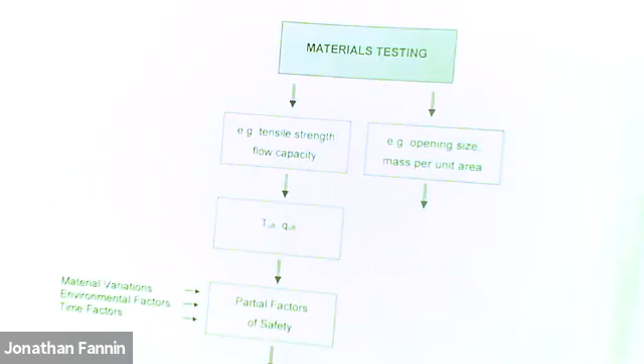And now some observations on philosophy.

What have we done? We've done materials testing, creep testing, wide width testing, and for example, I'll just pick up on this tensile strength.

We do materials testing for tensile strength, and we get a value of T out. That could be from wide width strength, or it could be from isochronous load strain testing and interpretation. So now there's our materials testing.

Now what about design? If we go over the page here, our design, whatever the design guide is - for example, US Federal Highways, British Standard, or the Canadian Foundation Engineering Manual, which largely cites the US Federal Highways.

Choose your design manual, your design guide, and you'll make an analysis, a geotechnical analysis, and the geotechnical analysis will tell you how much strength you require for the application. And at this point, we may be asking ourselves, is there a factor of safety in here?

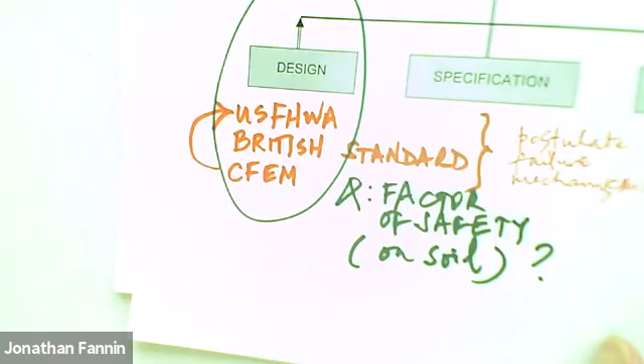And then ultimately, I want my T allowable, however I got it, to be larger than T required. The T allowable must exceed the T required. That's how the system's working - this is the heart of geosynthetic design for soil stabilization.

And once we've got the strength, and once we're convinced that we've got a satisfactory strength, then what about the following issue? So now let me continue with the thinking part here. Here's my wall structure, and I've put in a whole bunch of reinforcement.

And I've provided, let's put a base layer down there as well. They're all the same length, same vertical spacing, no problems. Even though it's not quite perfectly drawn, let's declare that they all have the same spacing vertically. Let's count the number of layers: 1, 2, 3, 4, 5, 6, 7. And we have 7 layers.

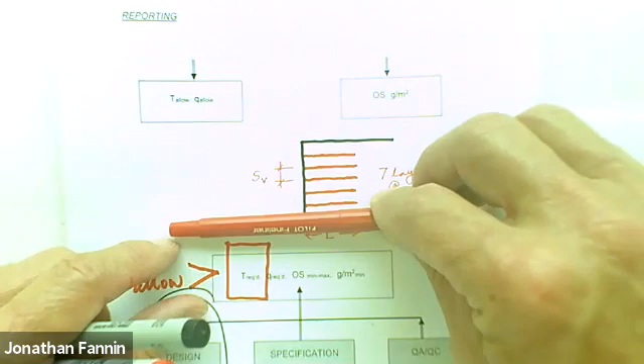At a T allowable, and that T allowable is greater than T required from design. Perfect, perfect, perfect, perfect. That's basically reinforced soil in a nutshell. And it could be a wall, it could be a slope, it could be a wall on soft subgrade, it could be an embankment on soft subgrades, okay?

Continuing with the philosophy here, the writers of the design guides may say these design guides are good for these applications, and we provide you with equations, limit equilibrium approaches for applications like this, but the design guide is not appropriate for other examples or applications such as this, that, and the other, because we don't have a basis of codifying. There may be some constraints on just how universally applicable the design guides are, okay?

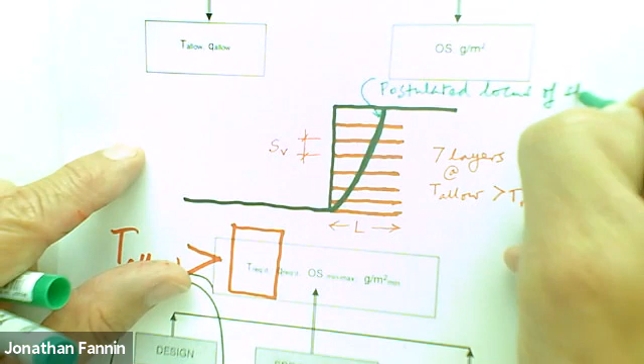Now, let me return to this image to say, so far so good. What have we left? What do you think we need to do as a closing on design? Let's say we postulated a failure mechanism, and the failure mechanism is a locus of slip like this, okay? There's our postulated failure mechanism. Postulated locus of slip. Okay, let's hope we've got this correct.

The final thing then to do is to make sure that we have adequate bonds. For example, the bond will probably be most critical at the top layer here, because the confining stresses are relatively low, okay? So this is the strength part, right? Let's put this as strength, and this is bond. So now we need to know something about interface friction and or bearing if it's a grid. This is the strength aspect of the design, adequate strength, and now we need to know something about adequate bond, okay?

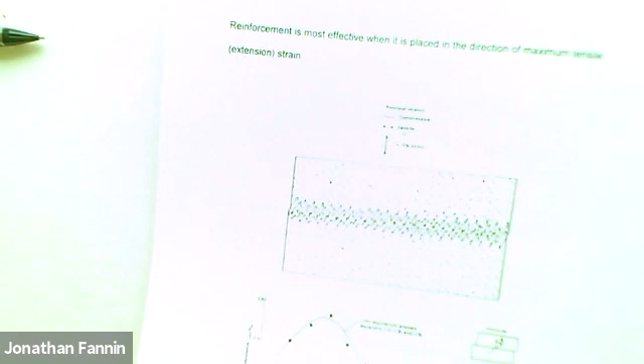So moving forward then, we flip the page, and let's ask ourselves a little bit about bond, okay? So I'm going now back into the literature. Let me grab a couple, bear with me, please. Here's a geotextile. Let me get another geotextile. Here's a black one, and let me get a geogrid. And I don't want you to think the whole world is made up of Tensar grids. So here is a woven geogrid, and here's an ancient Tensar grid, just because it's a little easier for me to show it to you in its full extent.

Right? Now, can you imagine? I embed this in soil, and then I want to pull it out. Okay, let me turn it sideways. There's the geometry, and I want to pull it out. I want to know something about its resistance to pull out, its bond. And you might postulate a means by which you think that bond is mobilized. How does it mobilize the bond? Does this geogrid mobilize bond in a similar or an absolutely identical way to this geogrid?

And again, let me translate it. Let me, can you imagine I've embedded it and I'm pulling it out, and it's being pulled past, okay? And how does something that has apertures like this, or apertures like this, how does the interface strength get mobilized? And how does that compare to something that's a perfect sheet or fabric?

Now let me take you to this. It's actually an image from a PhD thesis at Cambridge University a number of years ago. It's direct shear box testing, right? There's actually a very small offset. Do you see that very small offset there? And do you see the very small offset there?

So this is direct shear testing. The top half of the box has been pushed over the bottom half of the box, displacing it just a little bit to the right. Markers that were embedded, and at that time X-rays taken of the markers, are showing the development of a shear band. Here's the shear band. That's where all the action is happening in the shear box.

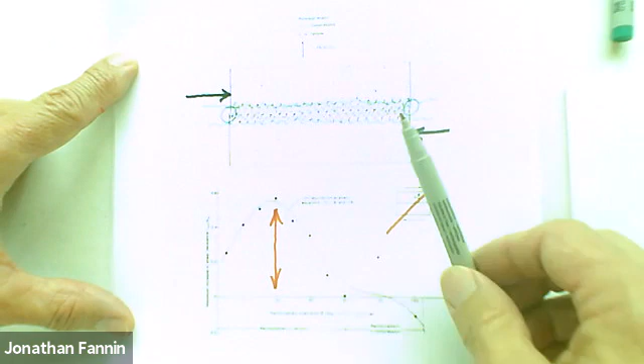And a fellow, Richard Jewell, came along and he looked at what if I orient the reinforcement in the shear box? I put some reinforcement in there and see what that does to the increase in the shear resistance. And what he found was that at about an offset or a reinforcement orientation of about 30 degrees, he got the maximum increase. There was an optimal orientation of the reinforcement, okay?

And that optimal orientation of the reinforcement, producing the maximum increase in resistance to shearing, was associated with orienting one or more layers of reinforcement in the direction of principal tensile strain in the soil. I think perhaps that becomes fairly self-evident to us. Now, if we take this recognition and I rotate this a little bit like that, can you imagine now, I'm going to draw on top of this, can you imagine now that I have, let me draw it as a slope.

Here is a sloped structure, and there is my ground surface. Can you imagine? Remember I drew that locus of slip earlier? We have a locus of slip. Do you see that? I have a locus of slip.

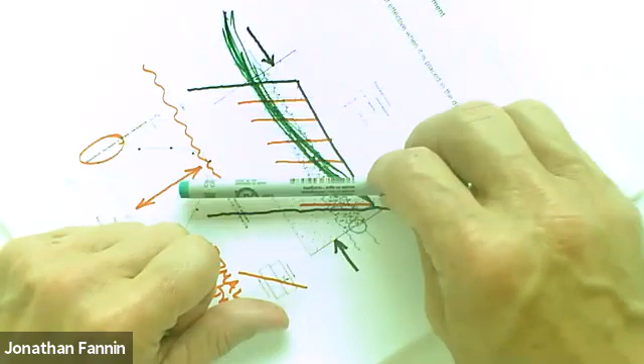It transpires that putting the reinforcement in horizontally is orienting the reinforcement across a locus of slip, aligning it in a direction that will cause it to go into tension in a reasonably optimal fashion. That's how it works. Reinforcement is most effective when placed in the direction of maximum tensile or extension strain.

And if it was a slope, or indeed, let me take it up and make it a vertical wall. It's this orientation of the locus of slip that's important to us. And what that does... oops, I'm knocking things around a little bit. What that does for us...

Let's now just examine one layer of reinforcement oriented at this reasonably efficient direction. What it tends to do is generate tension, and it's done by deformation. The deformation of the soil bonded to the reinforcement takes it into tension.

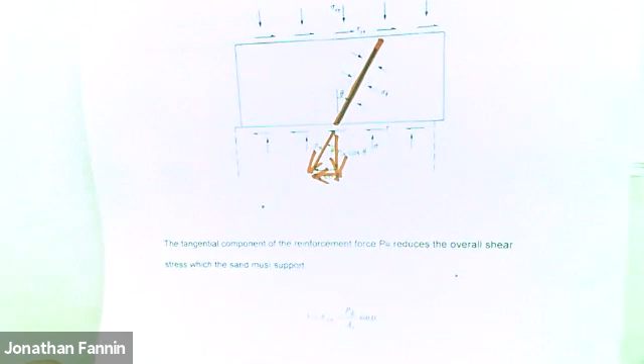We have a component like this, so we have the tension here, which we can split into a vertical component and a horizontal component. The vertical component tends to increase the normal stress a little bit. The horizontal component tends to reduce the overall shear. So that's a little bit of how the system happens to work.

So now we have a keen interest in understanding this interface bond, the soil geosynthetic interface bond. If I go back to the figure that we had a little earlier, see where I had the bond here? See where I had the bond.

Let me just... there we go. So I can even use that same phrase, soil geosynthetic interface bond. Let me write that in: soil geosynthetic interface bond, okay? And perhaps we'll go in here and put tensile strength. So how are we going to get this bond?

Let me use, for simplicity, a rigid sheet. I can get the interface bond by putting the rigid sheet in a test device, such as a direct shear, and shearing the top half filled with soil over the bottom half, in which this is resting at the plane of shear. In other words, I could go in to the previous page... I guess I can do it here. I could get the interface bond by running a direct shear test, and I'm shearing over the surface.

Let's take this out. I can get an interface bond in direct shear by shearing soil over the top surface of the material. And the alternative to direct sliding resistance would be to do a pull-out test - I could put the material in a box and then pull it out of the pull-out box.

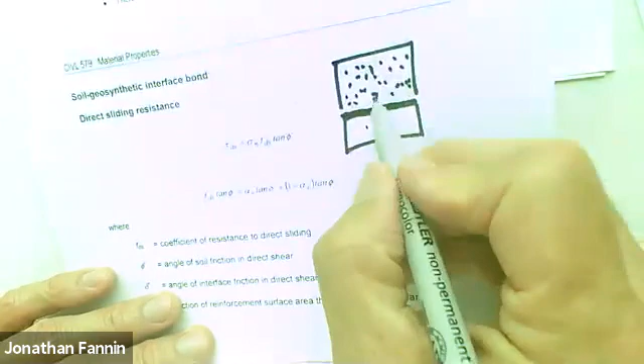So let's look at bond in one of two ways: in terms of direct shearing resistance or direct sliding resistance. So I have my shear box, with soil in the top half. And I'm going to block off and put the material of interest, which will have to be a planar sheet. Now I can shear the top surface over the planar sheet.

And I can get a shear strength that's a function of the normal stress and some coefficient acting into the angle of friction, phi prime. Then I can look at the efficiency of that. Can you imagine if I was to get the value of that interface friction?

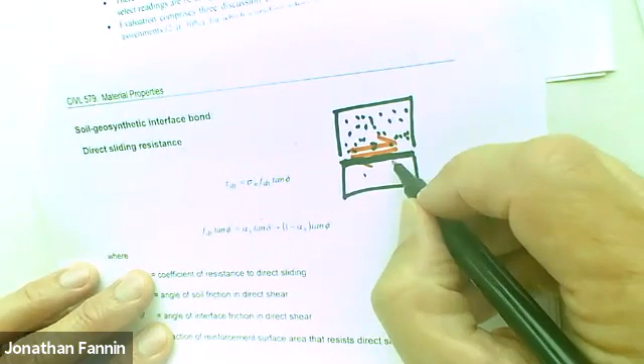Now let me look at putting in for this geosynthetic here - what if it was a geomembrane? For example, PVC, or a very low density polyethylene, or a high density polyethylene. What if it was steel? Just for purposes of comparison.

Let me also go in here and do one other thing - let me go in and put the normal stress.

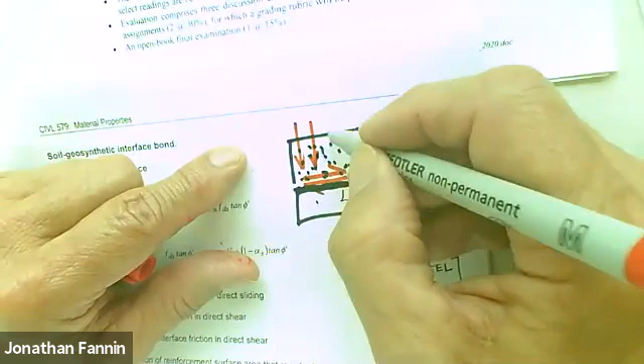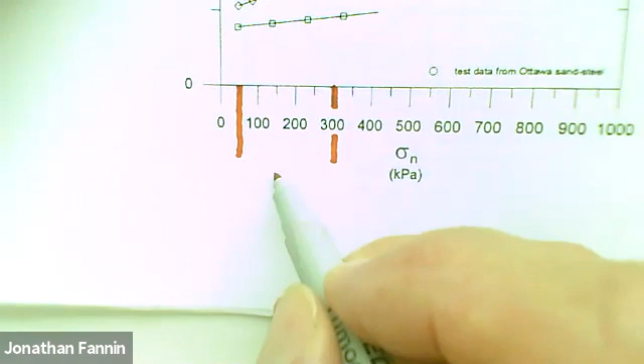Okay, and what I can find is the efficiency. Let's look at data for a range of normal stress. Let me take the normal stress from 50 through to about 300 kPa. So there are data now, let's go in and take a look at them. There are data from 50 through to about 300 kPa. There's our sigma n prime range.

What we find is that the interface strength is expressed here in terms of an efficiency: tan of the interface strength over tan of the soil strength. What percentage of the soil strength do we mobilize? That will take us up to a fully efficient interface where tan delta is equal to tan phi.

Now let me, I've got some, here we go. So here's PVC, very flexible, right? Quite soft. If I was to take an awl or a screwdriver, I could push it in there and indent the surface. That's in sharp contrast to the high density polyethylene, right? It's very hard, much stiffer, very hard. I will struggle to indent as easily in the HDPE as the PVC.

So now let's look at contrasting the interface frictional strength. PVC, there is PVC, the triangles. Look at the inclination of the triangles, let's go in and do this in pencil. These are the data for the PVC. I don't quite fully mobilize the strength of the sand, I get a percentage of it, maybe 80%.

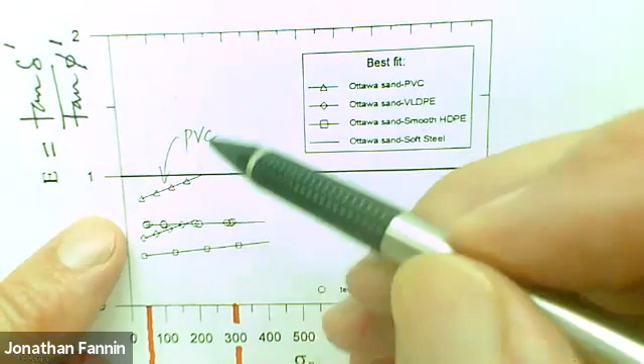As the normal stress goes up, as the soil is being further and further indented into the surface of the PVC, by about 200, 250 kPa, I'm mobilizing the full strength of the sand. And how am I doing that? I'm doing that because, can you imagine, the strength of the soil is indented into the surface of the PVC, and it's harder work for the soil to score itself, like iceberg scour. It takes more energy for the indented grain to scour its way through the PVC, so it's essentially stuck with the PVC, and the grains of sand above it are moving. Really, you've forced the locus of slip back into the sand, okay?

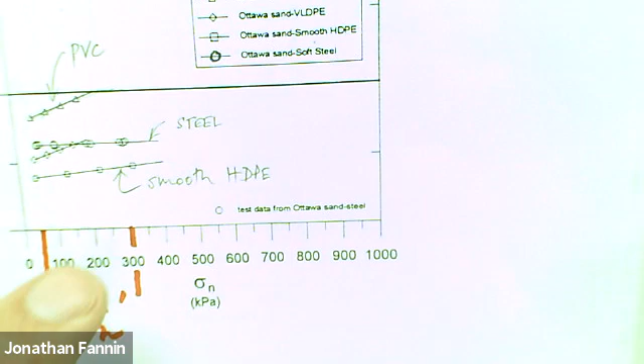Contrast that with smooth HDPE. The smooth HDPE has a much less stress-dependent response, not quite flat, less stress dependent. The PVC is steeper and has a much higher interface strength. In fact, if I went in and put the missing circle here, which would be for steel, this is the steel, it's actually stress insensitive. But do you see that HDPE has a lower interface strength than steel, for example? So there's an appreciation.

And you know what we should do as well is go in here and note the temperature. These data were acquired at UBC, in the grad soils lab many years ago, and the temperature is about 20 degrees centigrade or something like that.

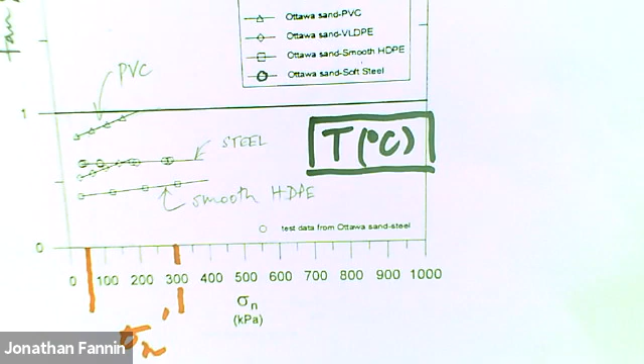That's our first shot at bond. What do we take out of it? Oh, by the way, if we were testing a geotextile, we would get almost a full interface strength. Can you imagine, let me again go back to my geotextiles, can you imagine the manner in which the sand will embed in the weave of the woven geotextile? Can you imagine the way in which the sand will embed itself in the Velcro-like surface of the needle punch nonwoven.

That's fine, but it's not going to give us, and we might well be interested in the interface shearing across the surface of a grid, in which case we know the interface strength of the material in direct shear, and we know what percentage of the area is available, and we get a composite shearing of soil over the plastic and soil over the soil in the aperture. So we can get to that.

But what about interface bond in pullout? Let me sketch a little pullout test device for you. I'm going to fill it with soil, and then we're going to pull the geosynthetic out. This is the embedded length, and we'll pull it out by clamping on this end and pulling it. And if the geosynthetic is a sheet, well then it's fairly self-evident. Sorry about that, I just got a little carried away in putting the presentation there.

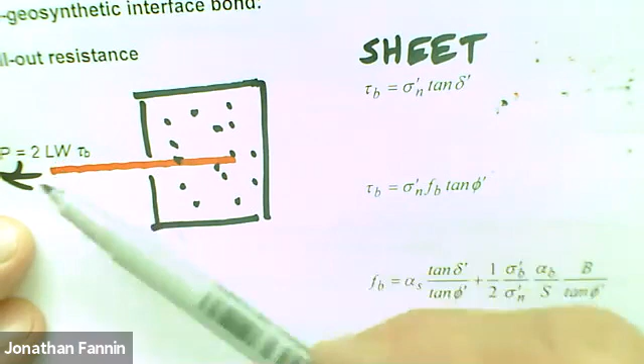So if it's a sheet, the interface shear, sigma n, there's our tan delta prime, and the pull-out resistance is 2 times the top and bottom surface, the embedded length times the width times the shear strength on it. If I was to draw it in 2D, I could put the length in, let's do the length here, just so we can see it. There's the length, and it will have a finite width, or I could have the pull-out force per unit width if I divide through by the W.

Now, if it was a grid, let's consider a grid, a geogrid. So the sheet might be a geotextile, the grid a geogrid.

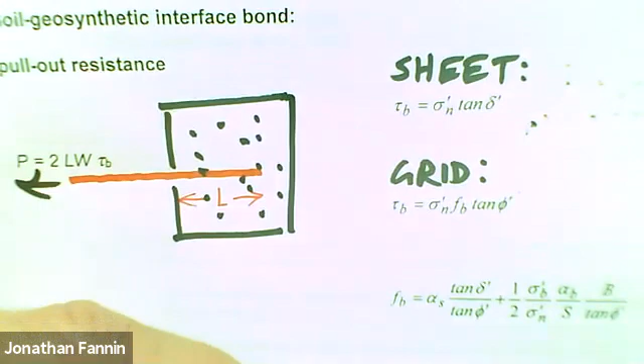Now we have an interesting situation - we don't have tan delta, which is a function of phi dash. We've got a bond coefficient. And this bond coefficient is picking up the fact, okay, let's get ourselves sorted here. This bond coefficient...

has an element - this is the bond of pulling out the grid. It will have a component which is shearing over the surface that is solid, and it'll have a component because there'll be an element of bearing. Can you imagine? Here, let's consider my pinky finger is just a grain or a gravel piece or something, but can you imagine the interbeddedness, and we get a bearing action as this is being pulled out. So we have two components: a shear component and a bearing component in pull-out.

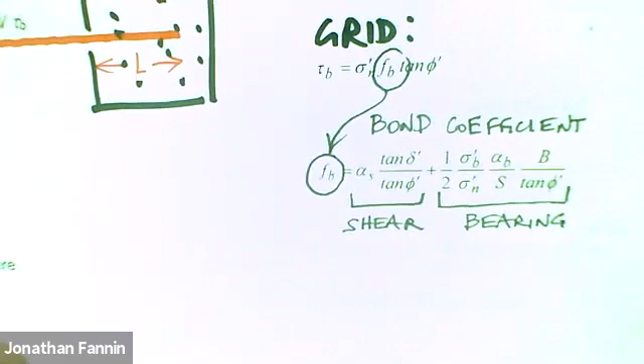Okay. The shear component we can get knowing the interface shear strength. If we wanted to look at it from fundamental principles, the bearing component, aside from - let me go in and work through some of the parameters here. Alpha S is the percentage area that's solid. Let me just see, do I have this little page?

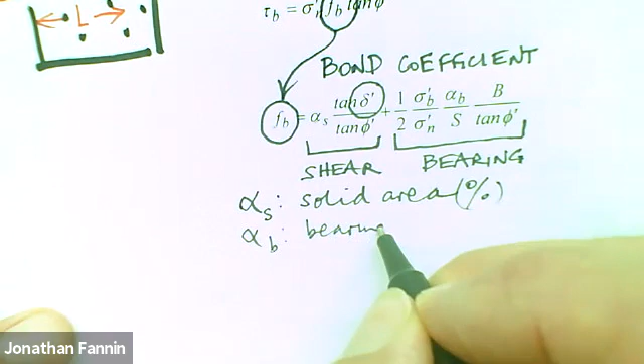No. So, alpha S, solid area, percentage. Alpha B, bearing area as a percentage of what's being pulled out. Let's not get too much into the details because it's only ever going to be reported as a kind of single number, but this is the constituent pieces.

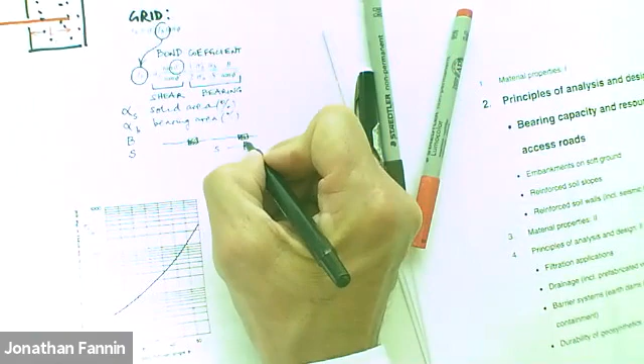Big B and big S. Let me illustrate that with regard to this. This is the thickness B of the bearing element that's being pulled through, and S is the spacing. Got to come out a little bit further again. S is the spacing between the bearing elements from here to here. Okay, so let me try and capture that in a sketch. There's one bearing element, there's another bearing element, that's what's making up the grid. And S is the spacing between the bearing elements, and B is the thickness of the bearing element.

Now, my reason for bringing this to your attention is to recognize that the bond coefficient is driven by geometry, interface friction of the surface area, and thus the bond coefficient for this grid, with its hard plastic and its spacing like this, that bond coefficient will be different to the bond coefficient, for example, for this grid, with its geometry, spacing, and surface treatment of the woven materials. So the bond coefficient is going to be product specific, just as you saw that the interface shearing resistance or direct sliding resistance is also product specific - PVC versus HDPE.

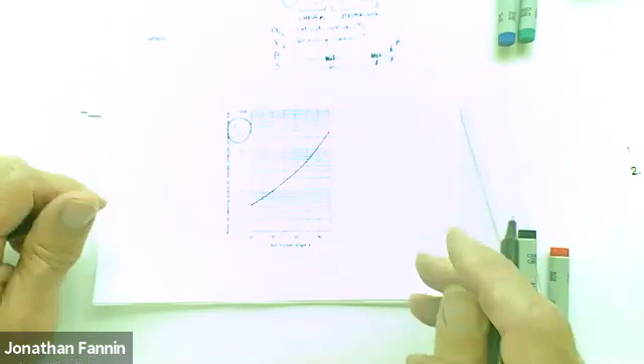And it's going to be controlled by the strength of the soil in the background, given phi dash as well. Now we've covered off everything in here except for this stress ratio. And Richard Jewell - I put this in, it's probably a bit redundant - but the stress ratio, just to complete things, there was an attempt in the early days. Interestingly enough, I've seen this figure in US federal highways ancillary design support documents, but the bearing ratio is also a function of the angle of friction. Okay, so really we could go into this bond coefficient here and argue that this component is also a function of this. Okay, so that's what I'd like to say about bond.

And why were we talking about bond, either in pull-out or in direct sliding resistance? And the reason we were talking about bond was, if I went back just a little further, we need to provide in design for adequate anchorage length. Thus, we need a bond coefficient, because in design we get the length of the reinforcement in a number of ways, one of which is to postulate the locus of slip, and then to add an adequate bond length, taking into consideration factors of safety to get the overall length of the reinforcement for an internal stability analysis.

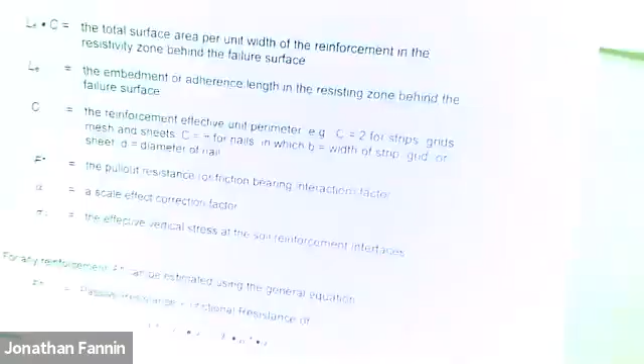Okay, the last two pages are a recasting of this concept in US federal highways language. So I want to close things off. We won't go through all of this in detail. The first US federal highways design document was written in 1990 by Barry Christopher and a bunch of other people under contract to US federal highways, and they looked at the pull-out resistance.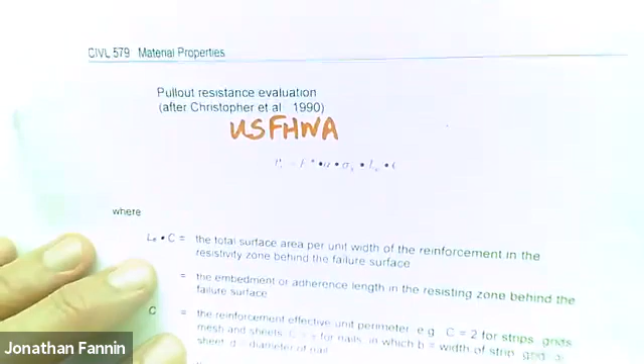It's exactly what we're looking at here, this pull-out resistance P. They captured it in a slightly different way. There's the normal stress, there's the strength, here's the constant, which for a sheet is 2 - that's written in here. But the key thing I wanted to get out of it is US Federal Highways casts the bond coefficient as, it's a curious phrase, F star alpha. That is their bond coefficient in North American design practice.

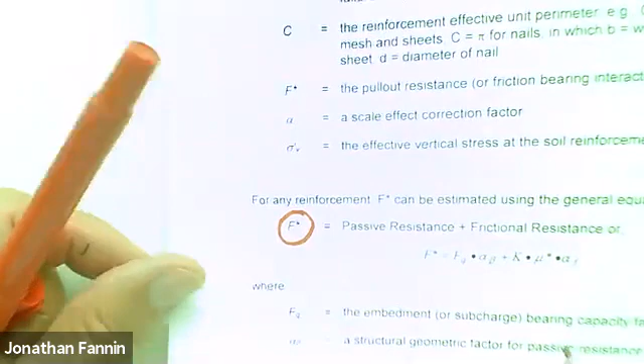I give you this page and the page over, but please don't get caught up in the details. If we take this bond coefficient down to here, the F star part of it has two components: passive resistance and frictional resistance. This is bearing, and this is sliding. Okay, so it's the same thing.

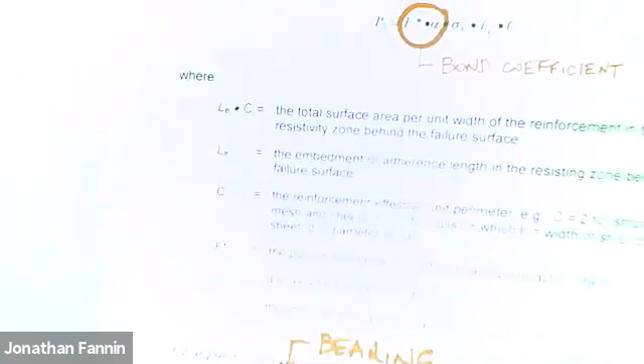I wanted to close by looking at a design guide, or the design terminology is a better way of putting it. You'll see all sorts of ways of trying to capture it and word it here. But the bottom line is that F star has two components, sliding and bearing, and it's a bond coefficient - it's just not the most intuitive way of describing it. The alpha is... I won't even go into the details, it's gonna dive us into more detail than we need now. We'll come back and look at this a little bit in the lecture on design of walls and US Federal Highways approach to that.

So there we go, interim summary. Let's have a little human connection here, people. That's pretty much the end of the material properties and its treatment: strength tests, creep phenomena, soil geosynthetic interface shear strength.

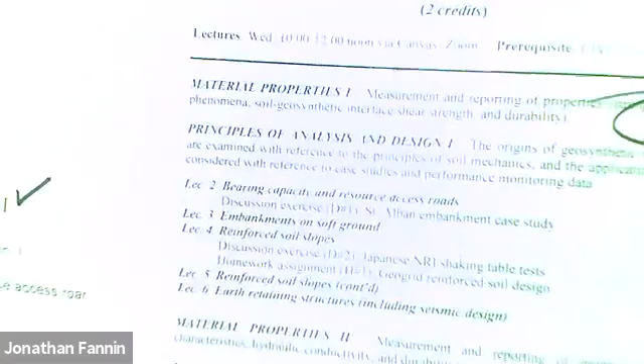The durability I'm going to park for a separate lecture of its own. How strong is it? Is it subject to creep? If so, how are we going to account for that in strength? And then what about this soil geosynthetic interface shear strength, and direct sliding and bond?

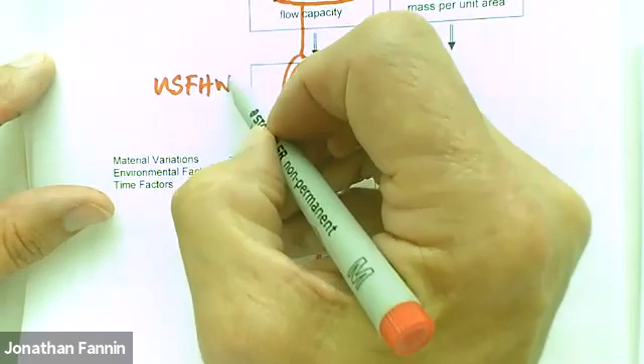No, it's not actually. The reduction from T ult to T allowable, let me see if I can annotate it here. US federal highways will take T ult from the wide width test. And in the design guide, for example, on embankments or on retaining walls, will suggest partial factors of safety. So in other words, the design guide will take you from T ult to T allowable.

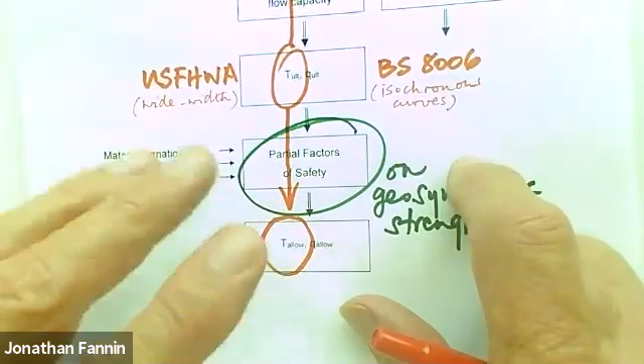And in the British standard, it's unfortunate that the acronym is BS, but it's BS 8006, which will be derived from isochronous curves. BS 8006 will also apply, but it applies differently. The US federal highways will have factors 1, 2, 3, and 4. They've got reduction factors and then factors of safety, and we'll see the subtleties of the difference.

But let's say there's a package, a series of reduction factors - I'm going to put RF because we'll see that when we get to design - these are reduction factors, a series of reduction factors, and a factor of safety. And the British standard likewise has a series of what they call partial factors of safety, and they call theirs FM. There's FM11, FM12, FM21, FM22.

It begins to feel like structural design because you're putting all these partial factors for different things. And that's in the design guide for the geosynthetic, along with potentially additional factors of safety on the soil to get the T required. Does that answer your question, Jason?

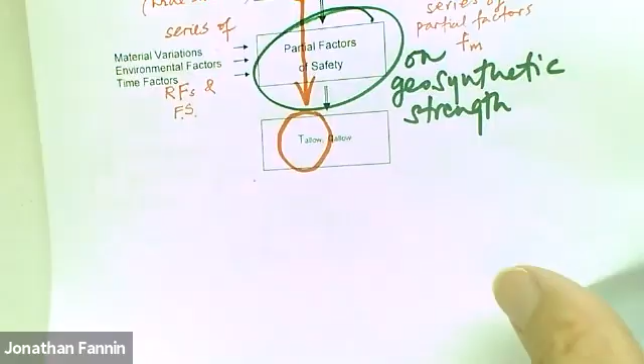Yes, and just one quick follow-up question. For the T ultimate from the wide width test, is that the minimum average roll value, not the typical value, correct? Correct. So there's already a statistical factor of safety applied to the T ultimate. That's absolutely correct.

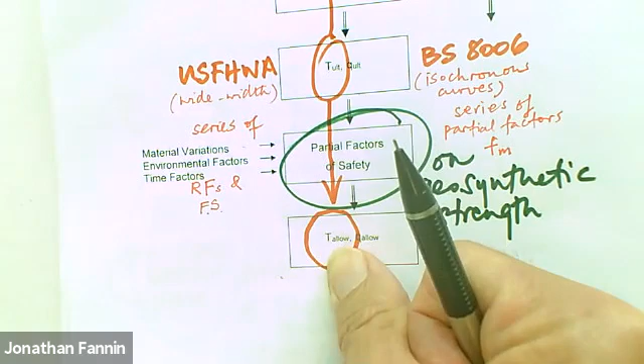And philosophically, I could add one other observation here. That's why geosynthetic reinforced soil structures tend to behave quite well in seismic zones, because by the time you've factored down from T ult to T allowable, and your T ult is a statistically low value for the production line, you are using a very, very small percentage of the strength of the geosynthetic with the T ult. And it's really where these two crosstalk, because using a very small percentage of T ult as T allowable means that you're loading it so lightly, it's not going to creep that much, number one. And number two, you have a tremendous reserve of strength between T allowable and T ultimate, so that if you put a very transient demand on the structure, like an earthquake, the geosynthetic has so much untapped strength that it's not being used, so it doesn't creep - meaning you can put your short-term demand on it and it can accept it without breaking in tension. And it's such a short duration demand, it won't creep much in the 2 minutes of the earthquake. So that's a philosophical complement to your correct observation on T ult being the statistically low minimum average roll value.

Thank you. You're welcome. Any other questions? Okay.

Reduction factors, like NILEX provides reduction factors, and I thought those were the only reduction factors, then you use the design methodology for the US. So what are those provided by NILEX when they give a couple of reduction factors for?

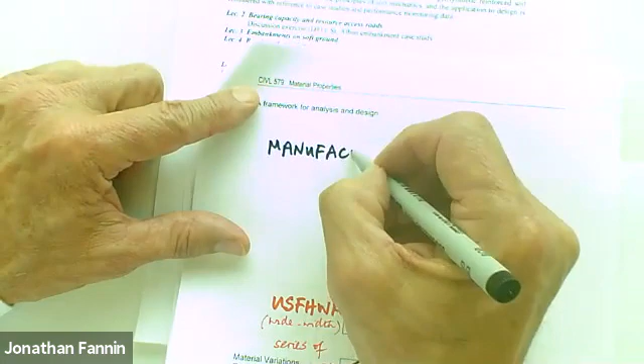Yes, so I'm going to speculate. Let me pull up the big picture here. NILEX is a supplier or a distributor. So let's acknowledge that in the background, let me sketch this. There's the manufacturer - they produce the geosynthetic. And then they get it to the construction site through a supplier or distributor, let's call them a distributor.

Their distributor—I just want to check spelling here, people, bear with me. I think it should be distributor with an O. There we go. They work through their distributors, and the manufacturers will provide a technical data sheet. They have a data sheet on their product.

It will give the minimum average roll value, the wide width strength, the grab strength, et cetera. So the manufacturer has a data sheet and supplies it to the distributor. You can actually go online and look at those data sheets. The distributor should really just be relaying the material properties obtained from the manufacturer. The distributor's role is strictly not to provide factors of safety, nor is it really the manufacturer's job to provide factors of safety.

Okay, so let's draw a line under the material properties and move forward to the resource access roads. I believe I released these notes to you. I'm going to speak to them for about 25 minutes. I want to reserve a little bit of time at the end of the lecture to speak to an assignment I'm going to give you, and the expectations for that assignment, and how it ties into both the material we covered last week and today, and how it informs our approach to embankment design.

Okay, so let us see how far we get. My main intent in this opening portion of the lecture is to start again with thinking—this is not a flow of directives, this is, what do you think? So philosophically, let's look at this. It's actually a series of sketches made by a very good friend of mine, Enio Palmeira, at the University of Brasilia. We shared an office together—he was a PhD student, I was a PhD student at the time.

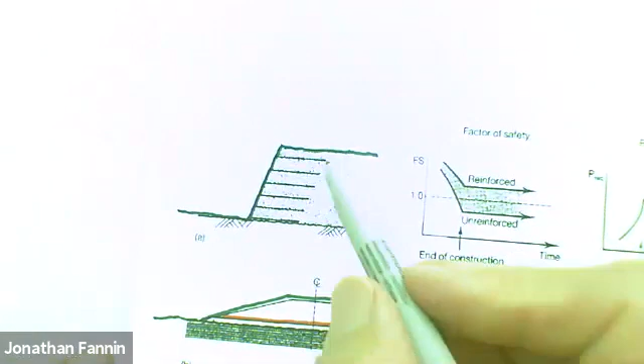Now let's look at the embankment. Do you see this sketch for the embankment here? There's a really nice series of thoughts. Here's the embankment on soft ground, right, and this is a layer of geosynthetic reinforcement at the base of the embankment. Here is a steep slope, with layers of geosynthetic reinforcement in it. And then the one we're actually going to look at is this one—we'll get to it third in the sequence of thinking.

Here, let's argue, is a resource access road, perhaps part of a vehicle loading scenario. We have a ballast layer or running course, and we may or may not have a geosynthetic layer separating the running or ballast layer from softer subsoil. Now think of this—I'm going to start with the slope. It's on competent ground, a competent, firm foundation.

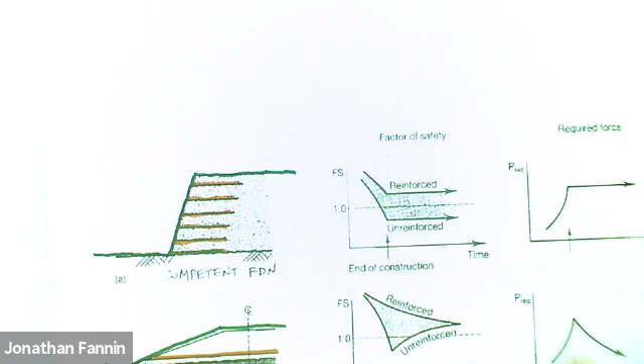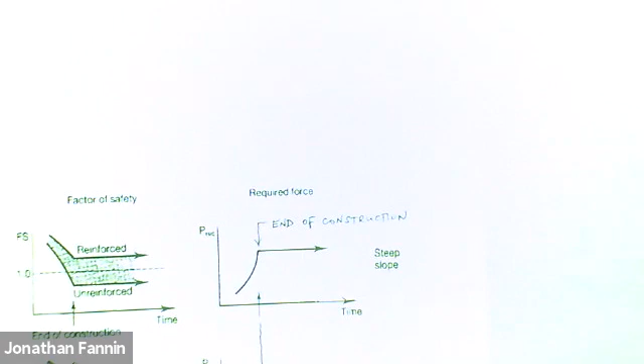You build it, and as you build it, you invoke tension in the reinforcement—there is the reinforcement force that's required. And in principle, at the end of construction, all of these little arrows are at the end of construction. Let me go through and capture all of them. The force in any layer of reinforcement in the steep slope gets mobilized, and it remains constant pretty much for the service life of the structure. If it was public works in the United Kingdom, the service life of the structure is 120 years.

Let's go to the embankment—from the steep slope to the embankment—and let's look at what happens. As we build the embankment, the force in the reinforcement is going up, but it doesn't remain constant. The force in the reinforcement goes down with time.

Why does it do that? Why does this do this, but this does that? Why is that? Why do you think that is? Do you have any thoughts? Does anyone have any thoughts as to why this system behavior is different?

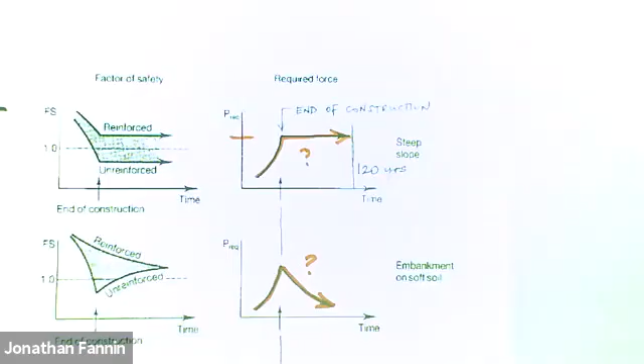Right? And it's a system. Any thoughts on that? Does anyone want to throw out an idea? Is it active versus passive loading? Active versus passive. Do you want to explore that a little bit more? Anyone else want to chip in?

You're onto something, I think. Let's ask ourselves, where is the capacity of this system coming from? And do any of those capacities change with time? So it's a little related to what you're hinting at. Any thoughts? And if not, I'll cut to the chase.

But would it be consolidation of the soft soil? Absolutely, absolutely. Thank you, Daniel.

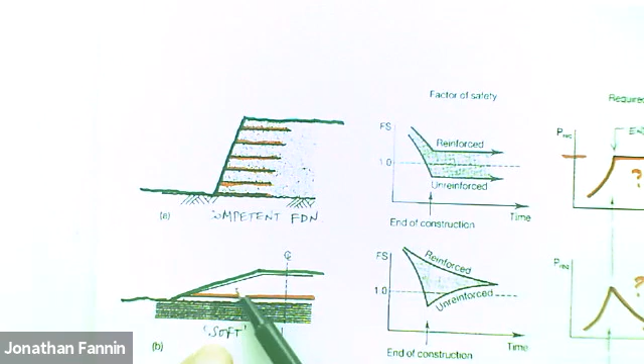This embankment on soft soil, the soil, let's call this a soft foundation. If the soft foundation consolidates and if its strength increases with time, then the capacity of the system is increasing with time. If the demand on the system, the height of the embankment, remains unchanged, then as the strength of the foundation soil contributing, for example, to the stability with a locus of slip, right?

If the capacity of one component in the system is changing, then the required strength of the reinforcement, the demand on the reinforcement, is diminishing with time.

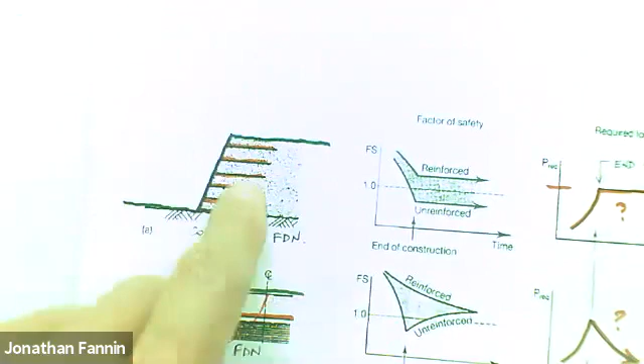Were this not a competent foundation, but a soft foundation, it's a tricky design situation when you're building retaining walls on soft foundations. Design guidance tends to start out throwing caveats in left, right, and center.

But if it's a competent foundation, there's no change in the capacity of the system. Whatever is your demand on the reinforcement, the day after the end of construction, it's going to stay like that.

And that's why creep is a big concern now. We don't really have much concern for creep if, in fact, the load is being shed off the geosynthetic, right?

So now what we're doing is we're thinking. We're asking ourselves, how does the system behave? Because you may not necessarily find the perfect design guidance for every application, and sometimes you're pushing things a little bit. So the key question is, how is the system behaving?

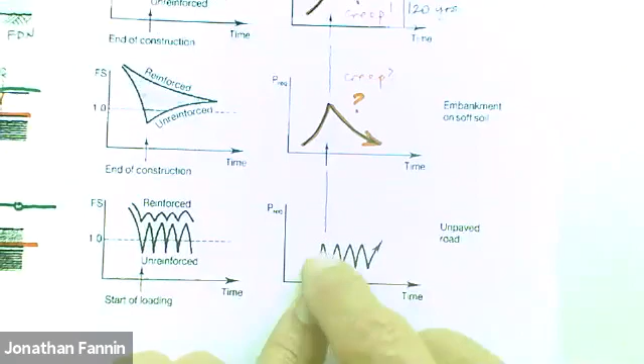Okay, and that takes us to the unpaved road over here, where the demand is a bit more cyclical. We may not have that much capacity enhancement from consolidation of the subgrade. We may or may not see a little bit there. You could question that, but largely it's a transient demand driven by the nature and axle loading and things like that.

Okay, I put this to you so that we can begin to see how, for bearing capacity, which we have here, the principles of analysis and design and bearing capacity, can you see that? They may differ to the principles of analysis and design for embankments on soft ground, which is what we see here, and what we see here, which may differ from the principles of analysis and design for reinforced soil slopes and retaining walls and bridge abutments, for example.

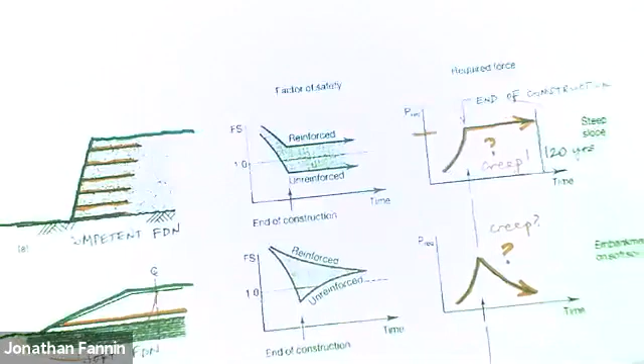Okay, so I want to continue this, influencing the way you think, and it'll cause you to ask the right questions and grow your competency. So, how does the system work? I'm going to take you to what I think is a very nice piece of work by a guy called Richard Jewell. And there's just one idea, okay?

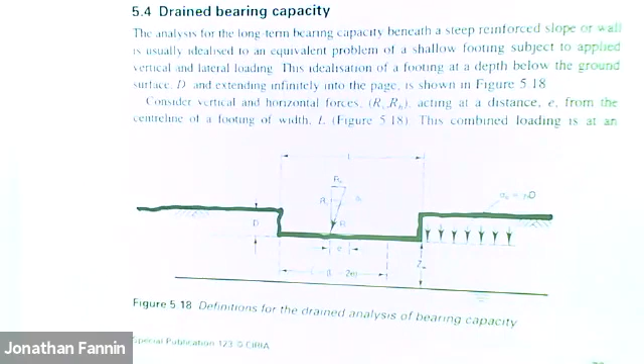And there may or may not be a water table present in the soil. He asks: what is the bearing capacity of a footing, where the footing may have a vertical load or an inclined load, and the inclined load may be centrally applied or eccentric from the center line of an infinitely long footing? And he starts there to ask why it is that the geosynthetic might improve the bearing capacity.

Let me put this question quite carefully. Does the geosynthetic improve the bearing capacity, or does it stop the bearing capacity from degrading as it would otherwise do? That's the classic soil mechanics problem.

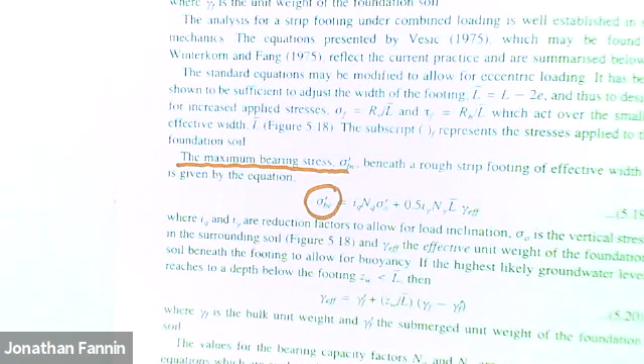I won't dwell on the details, and you can certainly read the text. Let me walk you through the highlights. He goes through and constructs an expression for the maximum bearing stress. If it's a cohesionless foundation, it has two components: one from the self-weight displaced in bearing, and if the footing is embedded below the ground surface, a component due to surcharge loading.

If the load is inclined, there'll be inclination factors. And if it's offset eccentrically from the center line, there'll be a reduced foundation width. That's what's in there, and you can read it through. Then he accounts for the groundwater level as we would ordinarily do — that's a housekeeping item.

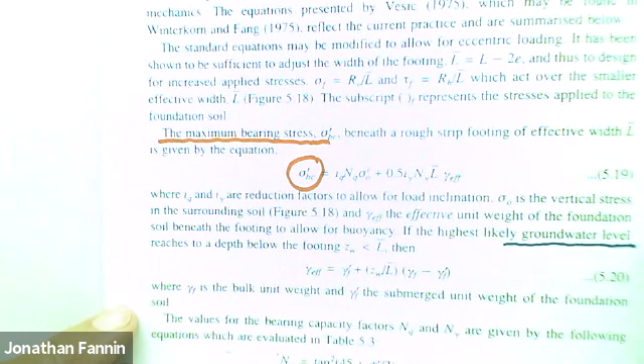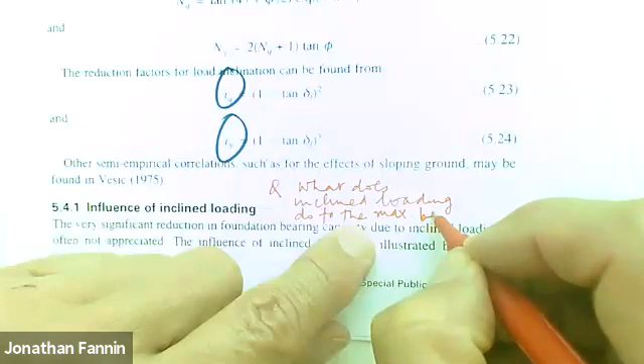Then let me come along and get these inclination factors for substitution into the equation — the question of the influence of inclined loading. His argument, I think, is neatly done. He says, what does inclined loading do to bearing capacity? Let me invoke this maximum bearing stress. What does inclined loading do to the maximum bearing stress?

We'll go looking for the answer now. He invokes Vesic — you can go to various bearing capacity factors — and he calculates the values for the inclination factors, the reduction factors for load inclination. There's our hint: the reduction factors.

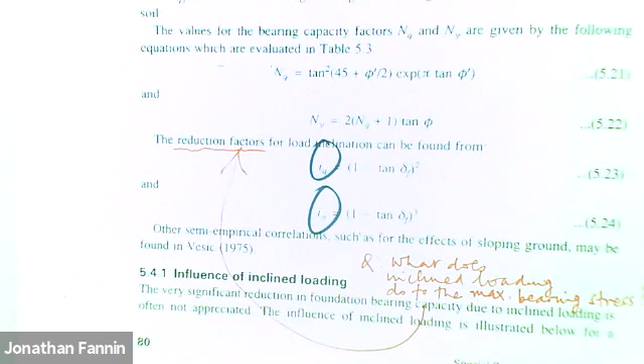Question: what does inclined loading do to the bearing stress? It reduces it. How much does it reduce it by? He goes through and crunches the numbers. If the load inclination is zero, no load inclination, then we have the full bearing capacity factor. Inclining the load, with load inclination, reduces the bearing capacity.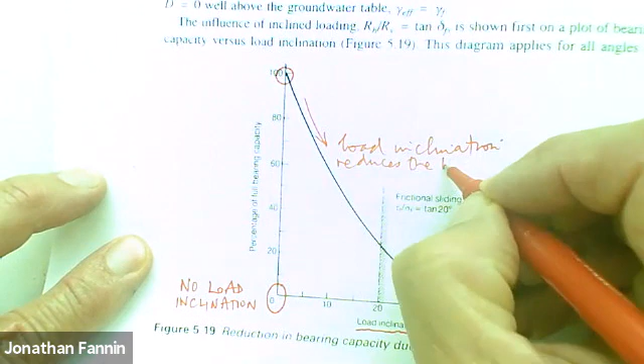That's the answer to the question: what does inclined loading do? It reduces the bearing capacity, and quite significantly. As he observes, a load inclination of about 10 degrees will reduce the bearing capacity to about 50%. It's quite punishing.

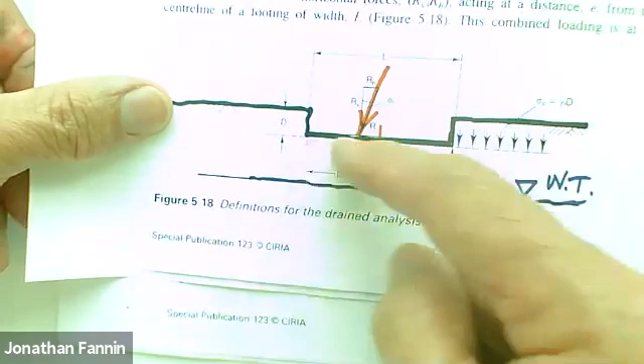What happens is that inclining the load produces an outward acting shear on the surface, because it's got two components, a vertical and a horizontal component. That outward acting shear degrades the bearing capacity, and this diagram applies for all angles of friction.

This is another representation of it. There's the full bearing capacity, a load inclination of 5 degrees, 10 degrees, 15 degrees, and there is the reduction. It's the same thing, just now expressed in terms of the bearing capacity factor. This we don't need, that's redundant.

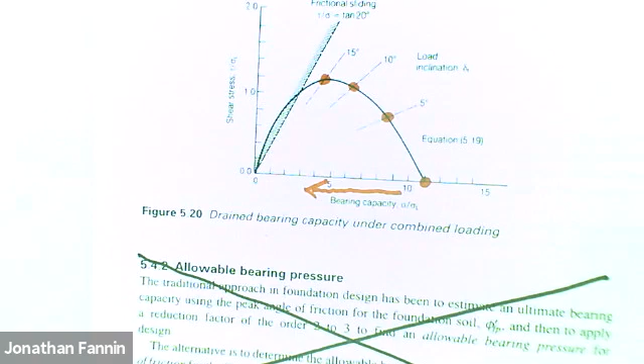And he looks at it from a drained bearing capacity approach — he looks at the undrained bearing capacity. Let me just make sure I can capture this for the drained bearing capacity. The important point in figure 5.19 is that a load inclination of only about 10 degrees is sufficient to halve the capacity of the foundation. That's a drained analysis.

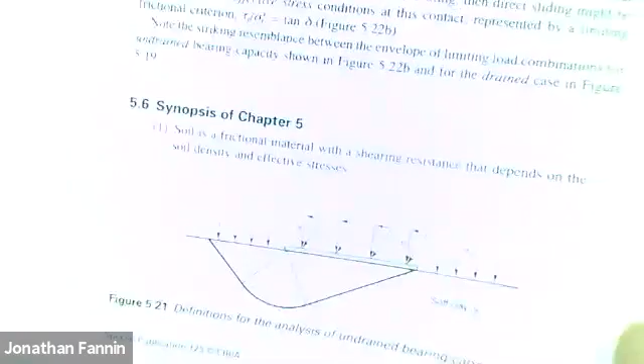What about an undrained analysis? So he does the same thing — he looks at the undrained bearing capacity. He invokes the work of Malcolm Bolton at Cambridge University, and in fact Malcolm Bolton was a fellow student at Cambridge at the same time. Here is Bolton's equation for that, and if you crunch through the numbers, here's the result.

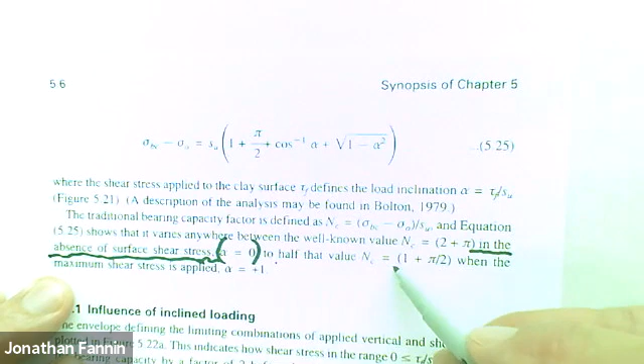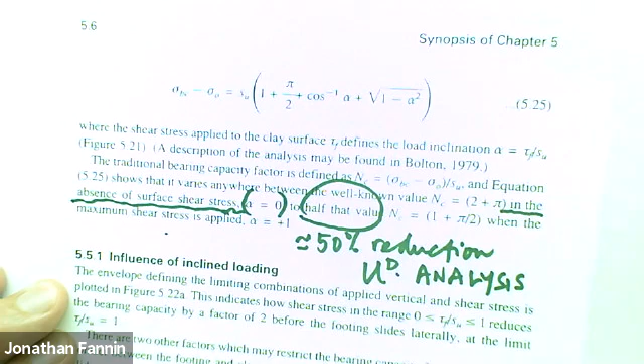In the absence of outward acting shear stress, that's the case when alpha equals zero, but it gets reduced to half that value when there's maximum shear stress, that's an outward acting shear stress. If you read through, there's the magic phrase, half the value, approximately 50% reduction. And that's the undrained analysis. So irrespective of a drained or undrained bearing capacity calculation, the presence of outward acting shear stress underneath the footing will reduce the bearing capacity.

And what the geosynthetic does when it's present in the system is to take up that outward acting shear stress. I'm going to illustrate this in this figure, and then we'll stop this thinking portion, and I'll move from the lecture to the discussion exercise.

Here is a schematic representation, actually from model testing. This would be the characterization of the vehicle loading, so it's really a symmetrical or almost symmetrical double footing analysis. This is an unreinforced system.

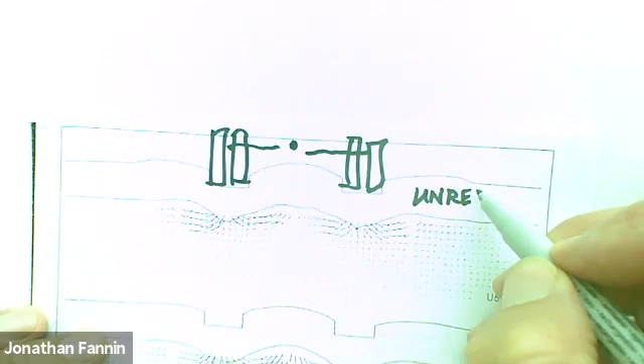Let me put this in: unreinforced, and below it is a reinforced system. It is reinforced with the presence of a geosynthetic at the interface between the soft soil and the dual footing arrangement. The same combination, let me take this out a little bit further.

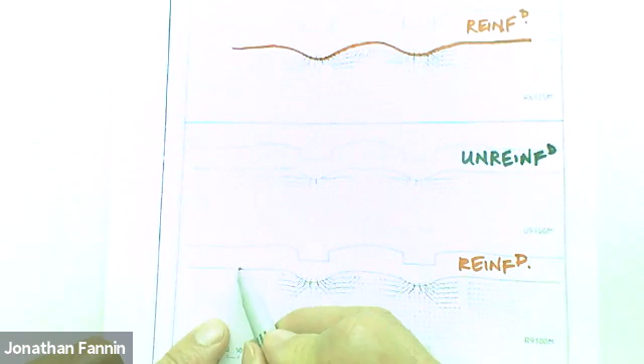That's one pair, the subgrade has a certain strength. Here is another pair below. So we have the unreinforced system here, and the reinforced. Again the reinforced has an element of the geosynthetic there. And in the experiments, by digitizing markers that were being displaced, you see the displacement vectors here.

So by moving from the displacement vectors, let's look at the upper one as the pair. There are displacement vectors. What happens in the unreinforced system, as Jewell argues convincingly, is these lateral deformations here, here, here, and here on the surface of the subgrade degrade the bearing capacity, and the bearing capacity reduces.

By putting in something, in this case a geosynthetic, by putting in something that can go into tension, you have less outward acting shear stresses. So by inhibiting that action, you're in essence promoting more of a vertical.

The degradation in the unreinforced system is much greater, relatively speaking, than the degradation in the reinforced system. And thus, by incorporating a layer of geosynthetic reinforcement in the system, you are acting to inhibit the degradation that would otherwise occur from the theoretical maximum bearing capacity associated with the outward acting shear stresses on the surface of the soft subgrade.

Okay, we'll draw a line under it at this point. I will return to look at a case study, because this begs the question that a stiffer and stronger, let's ask the next question. Is it correct? Here's the hypothesis.

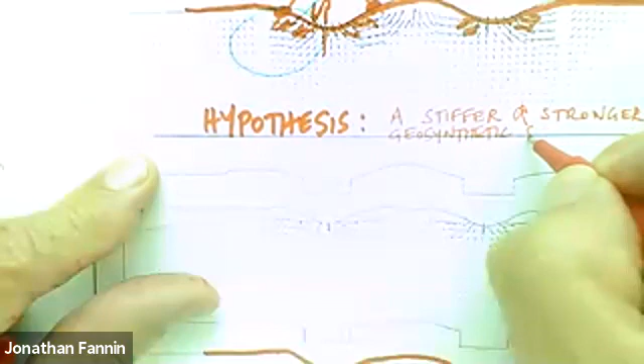A stiffer and stronger, but especially the stiffness, geosynthetic should yield a greater improvement. So if that's the case, let's run a field trial and test the hypothesis that a stiffer and stronger geosynthetic will be more efficient at taking up those outward acting shear stresses, and that the greater the stiffness of the reinforcement, the greater will be the maintenance of bearing capacity. Different stiffnesses, can you imagine that: the stiffer the reinforcement, the less degradation there should be.

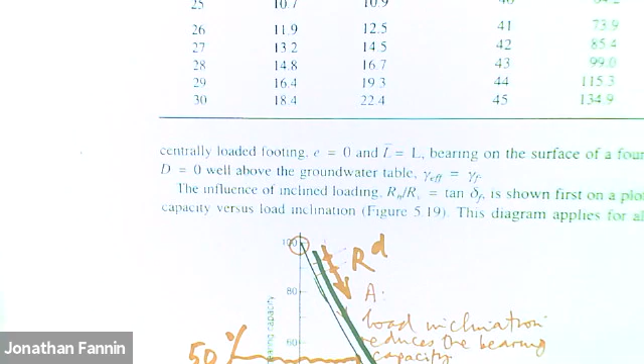So let me park those thoughts of Richard Jewell, very nicely captured on soil reinforcement with geotextiles in this construction industry serial report. When we return next week to pick up the lecture material, we'll look at a full-scale field trial, and let's see if we capture evidence of this phenomenon. Can we test the hypothesis and find it true or false?

Now, I released some materials, and I'd like to speak to them. Okay, so now what I'm going to do... oops, don't go away on me. I was going to do a timeout on the lecture.

Now let's turn to the learning objectives of the course and material to complement it. We're in lecture number 2, no big deal, we can follow the material. But I want to release this discussion exercise. You might say, what's a discussion exercise, what's going on here? So let me speak to it. I've released two pieces, and I'm going to release a bit more.

The discussion exercise: John Busbridge and a series of co-authors wrote a report, which I'll release to you, prepared for Transport Canada, written by John Busbridge at Golder Associates and collaborators at the University of Laval, August 1985. Some time ago, it's actually a very interesting report. So I'm going to give it to you, and the authors come up with a number of conclusions. Let's take a look at conclusions 3, 6, 7, and 9. You could go to the report - I'm going to release it shortly, after the lecture - and go to the conclusions. Conclusion 3, for example, here is a conclusion. Remember, this is the report that has isochronous load strain curves in it, for example.

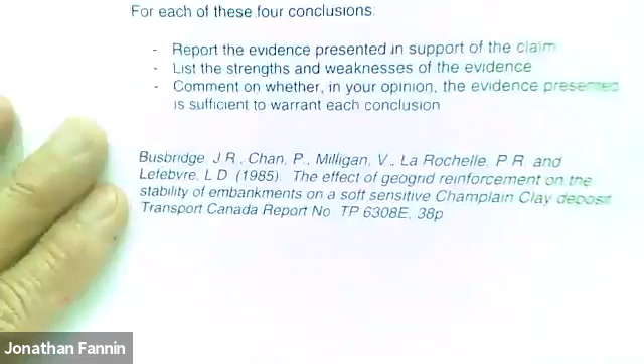And I produced this a number of years ago because what I found is that people were summarizing the report, instead of reporting the evidence, listing the strengths and weaknesses, and commenting on whether it's sufficient to warrant the conclusion. All I was getting was a summary of the report. So I write here: what are the discussion exercises, and there'll be three. This one's on embankments, the next will be on walls, and the third on barrier systems.

And I say, this is what ideally should be happening. Ideally, the authors would present data, qualitative and quantitative. They'd analyze the data, discuss the analysis, and present conclusions that follow logically from the analysis and discussion. That's the perfect world. Now, we don't live in the perfect world, but that's the perfect world. For those of you that go on to do an MASc or PhD thesis, that's the standard ultimately you'd be holding yourself to. So the conclusions would be evidence-based, and the claims would involve little or no speculation. That's the perfect report.

So now I ask you to go in and please don't summarize the contents. Please don't submit a summary of the report. Rather, this is what I ask you to do: read the report, report the evidence, do it in a brief and succinct manner. Then list the strengths and weaknesses. And finally, you need to say yes, no, or maybe you find the claim warranted by the evidence that the authors present.